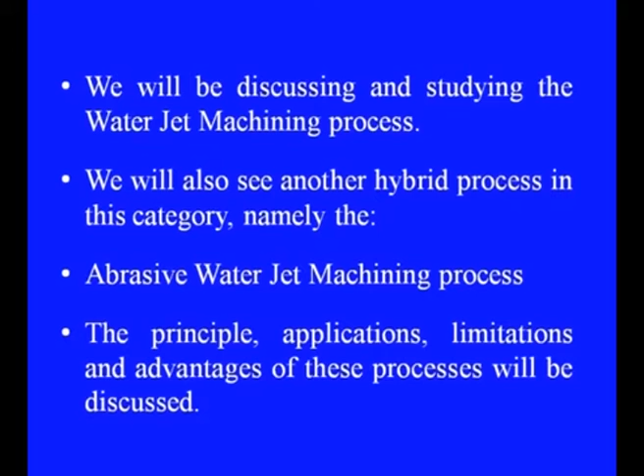Now, let us move to water jet machining, popularly known as WJM. In this process, a water jet is used which acts as a tool in the form of a water saw. This water jet at high velocity and pressure is able to slice materials and some metals using abrasive particles mixed in it. This works something like this.

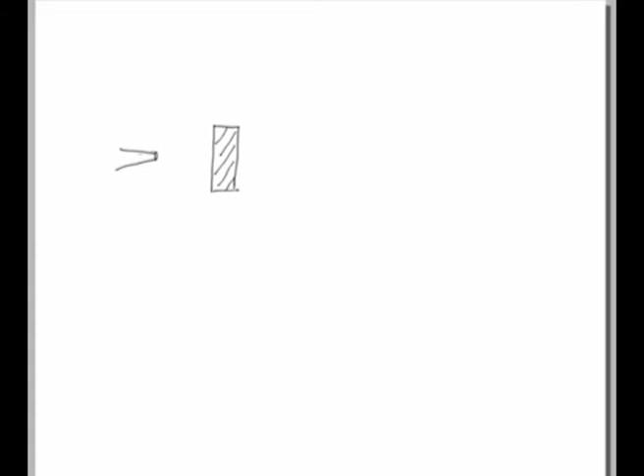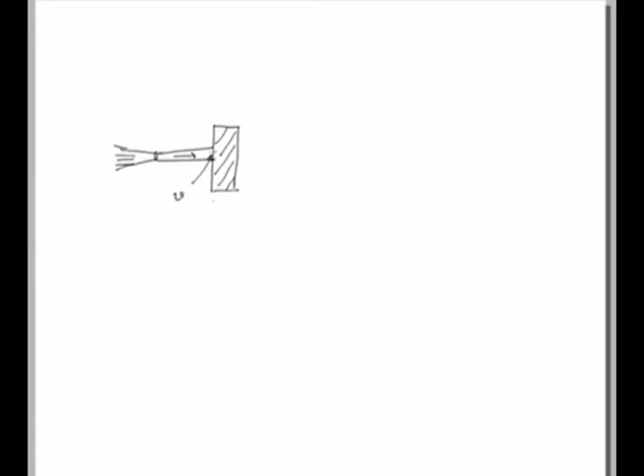Let us consider this is the target material to be machined, and we have a water jet at very high velocity coming through this. This will strike the work material at a very high velocity V, and because of the kinetic energy of these particles, this will cause a crack into the work material, which will ultimately cause failure of this material.

And this will cause removal of the material along the dimension of this jet. So, if this is the profile of the jet, then this will cut or form a cut on this material, something like this, after repeated application of this jet for a particular period of time.

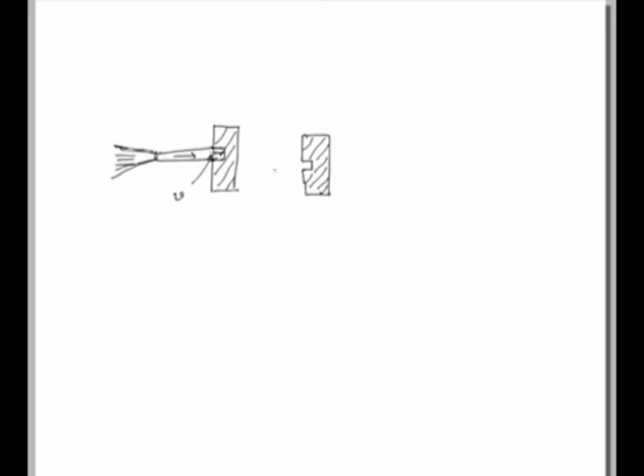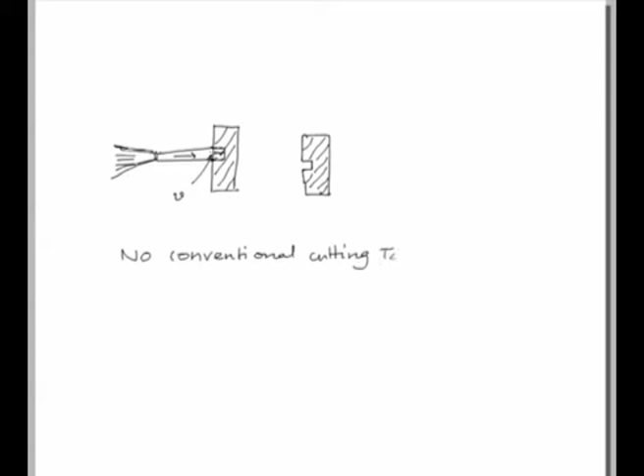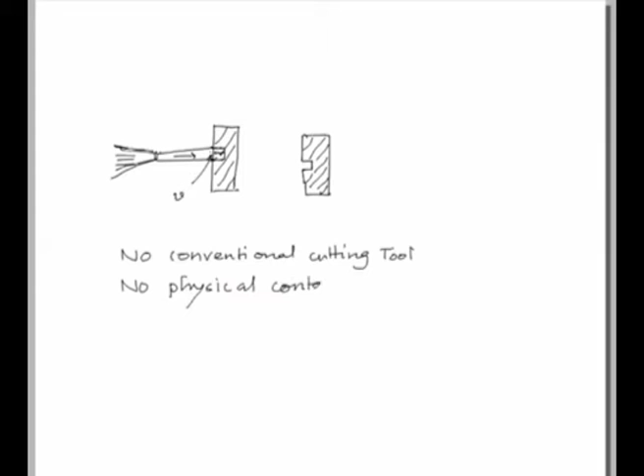So here, therefore, what we conclude is there is no conventional cutting tool, what we call in conventional technology, and therefore no physical contact between the two. The contact is only through the water jet, which attains very high velocity through this jet by the process of conversion of high pressure into high velocity while passing through this jet. So, in brief, this is the working principle of this particular process.

Let us see in detail about the process, its different components, advantages, disadvantages, and so on. This process resembles the water erosion phenomena existing in nature. In this process, water is greatly accelerated, as I have already shown, and further concentrated on the target workpiece.

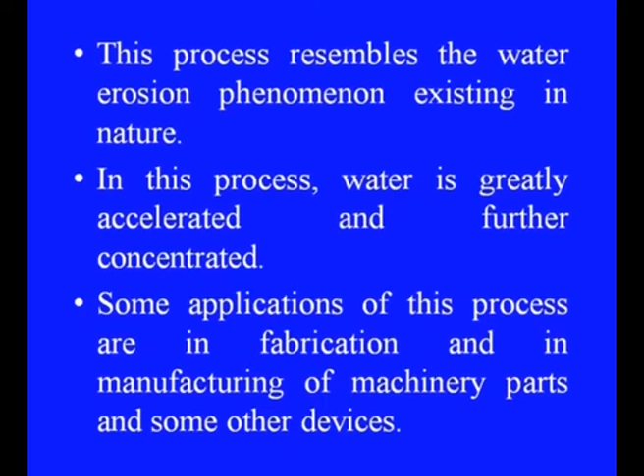Some applications of this process are in fabrication and manufacturing of machinery parts and other devices. Basically, brittle and hard materials are more suitable for this particular process, although all sorts of materials including rubber and metals can be machined or cut.

As most metal cutting techniques generate high heat affected zones, also called HAZ, this method is free from fabrication induced defects. This is a big problem with almost all thermal based manufacturing techniques, where very near the cutting zone there will be a defective zone, also called heat affected zone. But in this process, being a mechanical process, there is no heat affected zone related to water jet cutting or machining. This method is moreover environmental friendly, hence it is more preferred.

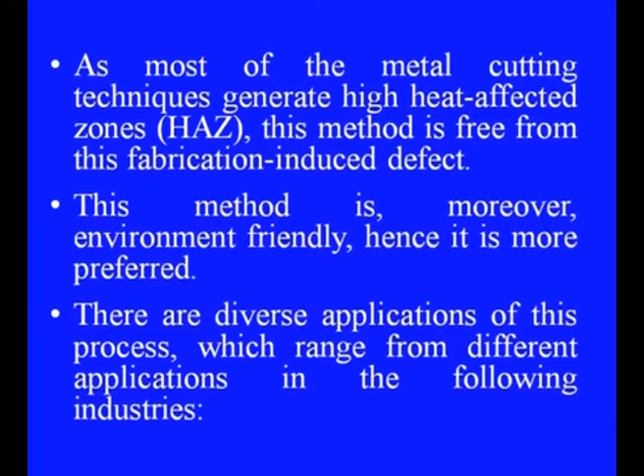There are diverse applications of this process, ranging across different industries. In mining industries, rocks and hard materials can be very easily cut without causing any chemical disturbance to the mined materials, or any possibility of fire hazards, as there is no temperature increase in this process and the working fluid used is water. Then in aerospace industries, it is primarily used for cutting, carving, and shaping applications.

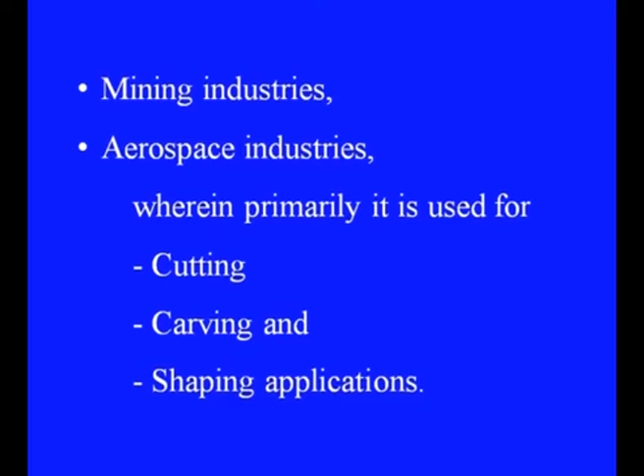Water jet machining and abrasive water jet machining have potential for cost reduction and speeding up the process through considerable reduction in secondary processes of machining. The cut edges are clean with fewer burrs, as there is no heat application.

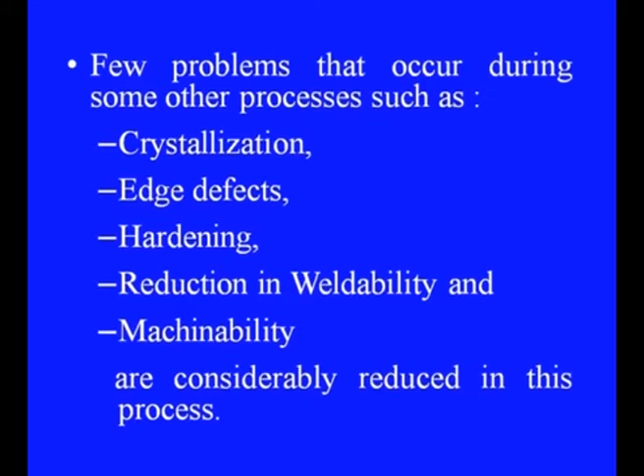Few problems that occur during some other processes include crystallization, edge defects, hardening, and reduction in weldability and machinability. These are some problems associated with other popular manufacturing techniques, but these types of problems are considerably reduced in the water jet machining process.

This fluid is drawn up by a pump system and intensifier, which pumps it to an accumulator, where very high pressure water will be created. This pressurized water will be allowed to flow into the nozzle through some control device. Control valves will be there in between, helping the operator maintain the quantity of water being flown.

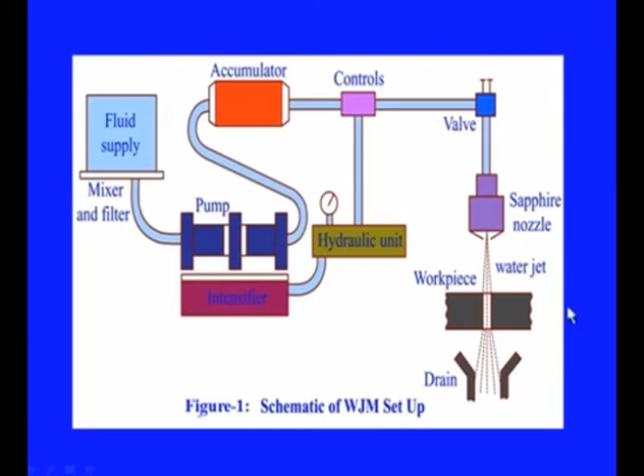This basically enhances the performance of the cutting process, or the efficiency of the entire setup gets enhanced. So in this entire system, the following major components are required.

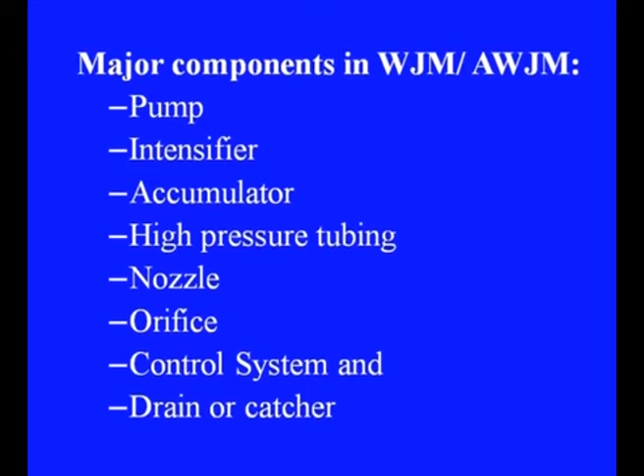Number 1 is the pump for pumping the water, then the intensifier and accumulator which will accommodate the high pressure water, then high pressure tubing through which the pressurized water will flow in, and the nozzle through which the pressurized water will be directed to the target workpiece, then the orifice through which the water will actually come out, then the control system for controlling the flow of water pressure or the flow of abrasives and the appropriate mixer, and then the drain or catcher for the water coming out after the workpiece.

The pump is used to create pressure in the liquid in the range of 1500 to 4000 bars. Thus we can see this is a very high pressure that will be created in water. In achieving this pressure, an electric motor of 50 to 100 horsepower rating is used.

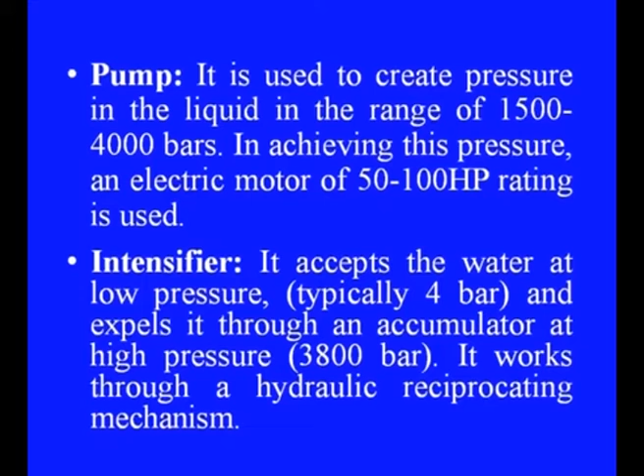Now let us see what an intensifier is. It accepts water at low pressure, typically at 4 bar, and expels it through an accumulator at high pressure, approximately 3800 bar. It works through a hydraulic reciprocating mechanism which is responsible for intensifying or enhancing the pressure of the fluid.

Then what happens in the accumulator is it maintains the continuous flow of high pressure water and eliminates pressure fluctuations during the working of the system. A continuous pressure is maintained through this unit, which is also known as the accumulator.

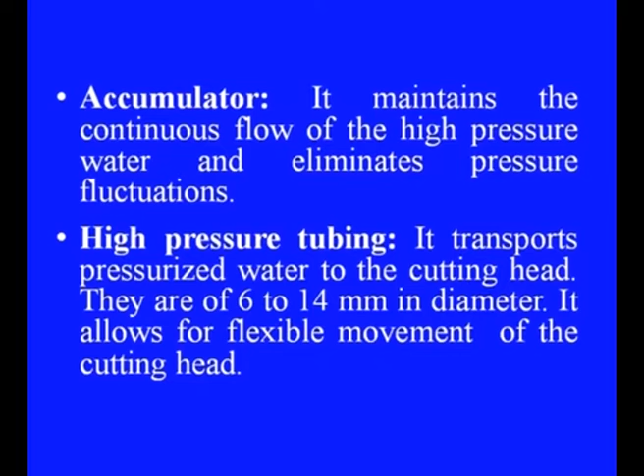Then a high pressure tubing. The function of this is to transport pressurized water to the cutting head. They are 6 to 14 millimeters in diameter, depending on the application in which we are using it, and it allows for flexible movement of the cutting head. Jet cutting nozzle.

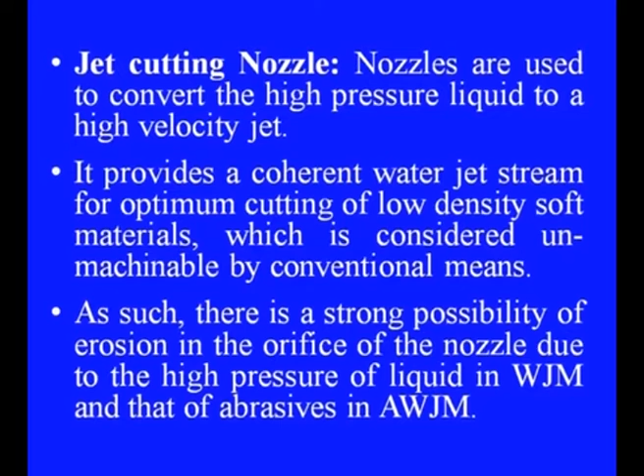These nozzles are used to convert the high pressure liquid into high velocity jet. This is the unit where this pressure, high pressure will be converted into high velocity. It provides a coherent water jet stream for optimum cutting of low density soft materials, which is considered unmachinable by conventional means. As such, there is a strong possibility of erosion in the orifice of the nozzle due to high pressure of liquid in water jet machining and that of abrasives in abrasive water jet machining.

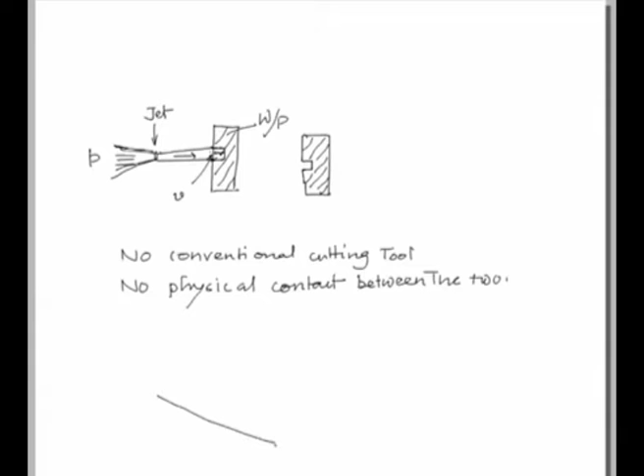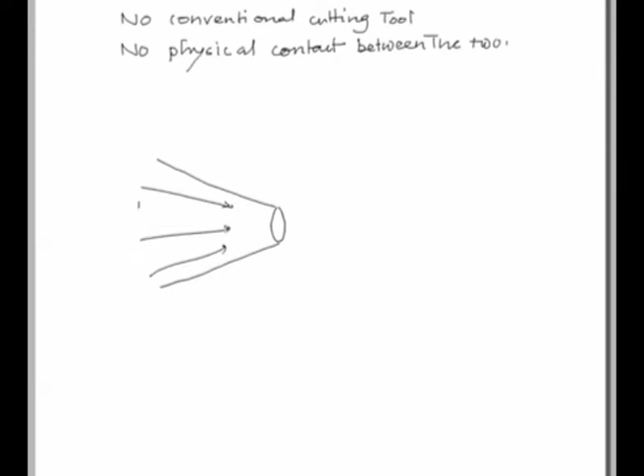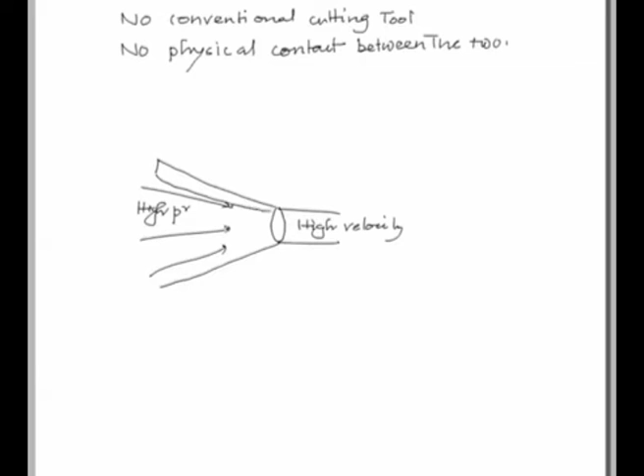This jet is a very crucial component in this entire setup. Since the water will be coming through this at very high pressure, at this stage it will be of high pressure, and at this stage while discharging it will be of very high velocity. Therefore, there is every possibility that this jet wall may get eroded or some deteriorations on this jet wall will take place because of this high velocity fluid passing through this.

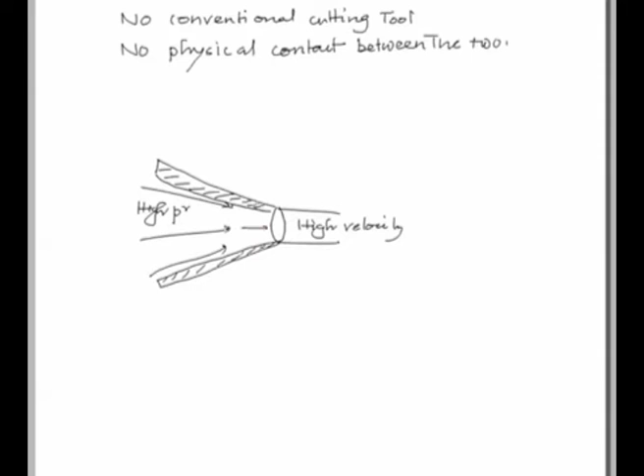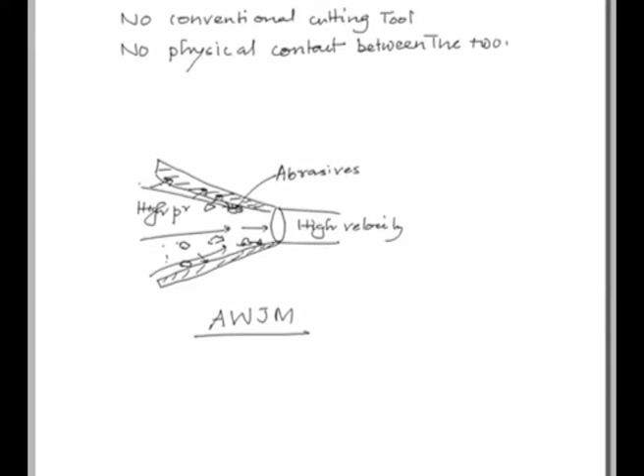Also, if this is AWJM, abrasive water jet machining, then in addition to this water there will be abrasive particles mixed in, and these jet walls are the materials which will have to withstand this pressure of this fluid as well as the impact of these abrasive particles. Now, because of this continuous impact of these abrasives and this flowing fluid, these jet walls may get eroded very frequently, and this is one of the major problems being encountered in this system. Therefore, choosing the right material for this jet or this nozzle is a very big question.

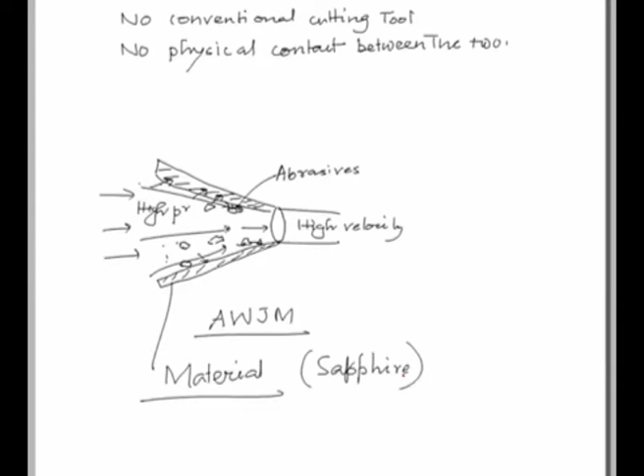Generally, sapphires are used, which are considered to be a very good material as far as these nozzles are concerned. Therefore, a high wear resistant material such as synthetic sapphire is used as nozzles, as I have already told, and a picture is there on the screen also. This is how it works.

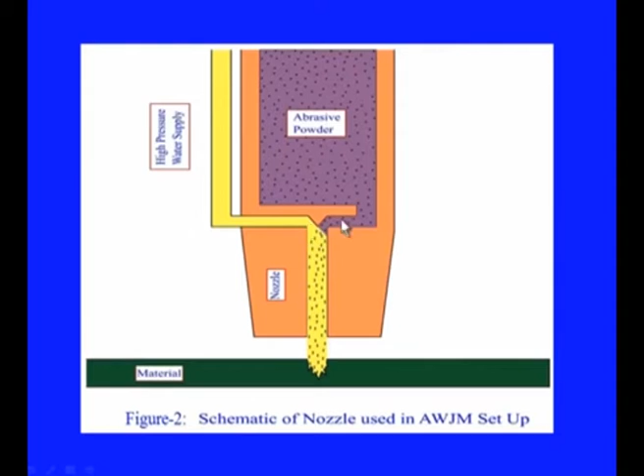This is the abrasive powder or abrasives, and this is the high pressure high velocity water coming out, and this is where it gets mixed. This jet or nozzle wall will have to bear this pressure as well as the abrasive action of these abrasive materials, while enabling this jet, this mixture of high pressure water as well as the abrasives, through this.

Let us see the functions of the drain or the catcher. It acts as a reservoir for collecting the machining debris entrained in the water. It also helps to reduce the noise level associated with the reduction in velocity of the water jet.

Now, let us look into the factors that affect water jet machining performance. These factors are generally grouped into three major categories. The first is jet or nozzle based parameters. Here the jet diameter or the nozzle diameter is one of the major factors. Higher the diameter of this nozzle, the more possibility that the water stream coming out through this nozzle will get diversified, or there will be more diversion.

Then the standoff distance, as we have seen in case of abrasive jet machining, is the distance between the jet opening and the target material. This is a very critical parameter. Depending on this, the energy with which the energized water particles and the abrasive particles hit the target will vary, and accordingly the performance of the process will also vary. There has to be an optimized distance for this standoff between the nozzle and the target.

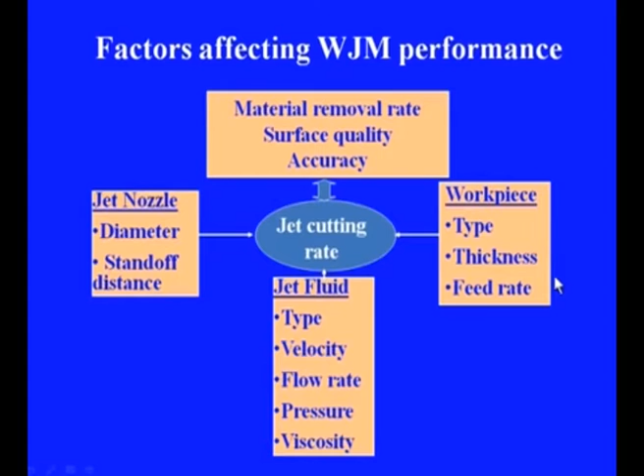Then the third category is the workpiece related parameters. Here we consider the type of the workpiece, the thickness of the workpiece, and the feed rate of the workpiece. It is to be mentioned that if the thickness is very high, the process may not be very efficient. So all these three categories of parameters will affect the final outcome of this process, which is either cutting, finishing, or cleaning of the target surface.

Let us see a few parameters like what are the cutting rates for various materials, like leather. For leather of thickness 2.2 millimeter, feed rate used is 20 meter per minute. Similarly, if the material is vinyl chloride with a thickness of 3 millimeter, the feed rate suggested is only 0.5 meter per minute. Similarly, for polyester of 2 millimeter thickness, the feed rate is 150 meter per minute.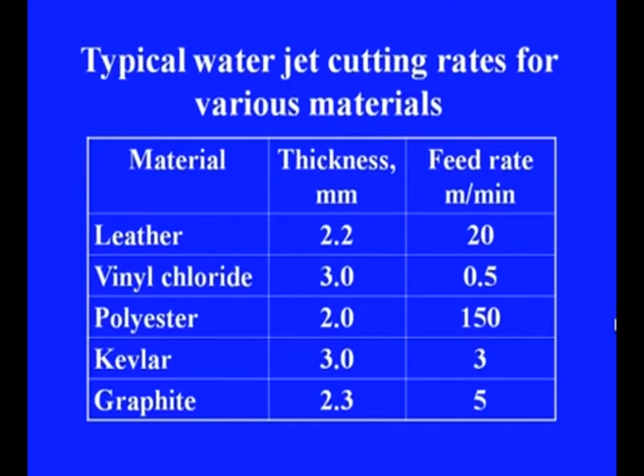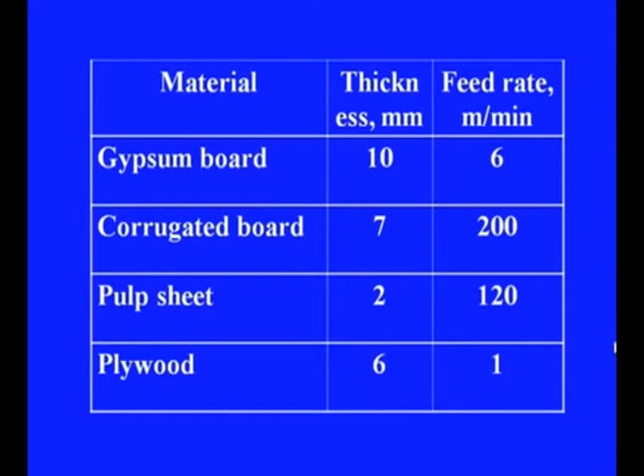For Kevlar of 3 millimeter thickness, only 3 meter per minute. Then for graphite of 2.3 millimeter thickness, 5 meter per minute is recommended. For gypsum board of 10 millimeter thickness, feed rate is 6 meter per minute. Corrugated board of 7 millimeter, feed rate is as high as 200 meter per minute. Pulp sheet for 2 millimeter thickness, feed rate suggested is 120 meter per minute. Then for plywood of 6 millimeter thickness, 1 meter per minute feed rate is suggested.

Abrasive water jet machining is a subcategory of water jet machining in which an abrasive is introduced in the water to accelerate the process, as I have already discussed with the help of diagrams. Hence, this abrasive water jet machining process is duly considered as an extension of the water jet cutting machining process. It is also called a hybrid process of basic WJM, in which hybridization in the form of abrasives leads to an enhancement in the cutting performance or the cutting rate.

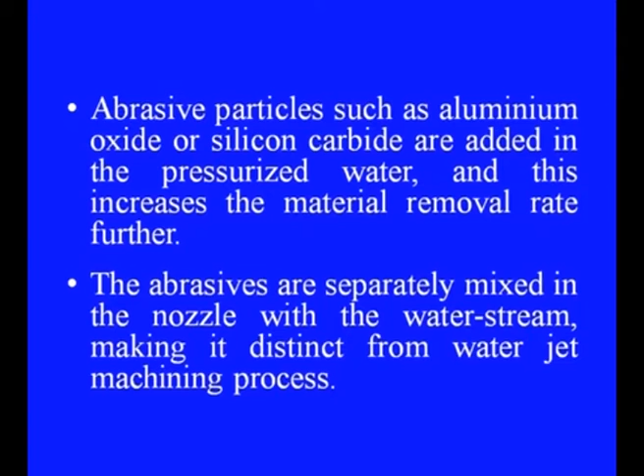Abrasive particles such as aluminum oxide or silicon carbide are added in the pressurized water, and this increases the material removal rate further. The abrasives are separately mixed in the nozzle with the water stream, making it distinct from the water jet machining process, in which only pure water is used as the cutting media.

The abrasive water jet cutting process is suitable for machining different types of materials, ranging from hard, brittle ceramics and glass to soft materials like rubber and foam. In fact, water jet machining process is considered to be a very effective machining process for cutting very soft materials like rubber and foam, which are otherwise difficult to cut by some conventional machining processes.

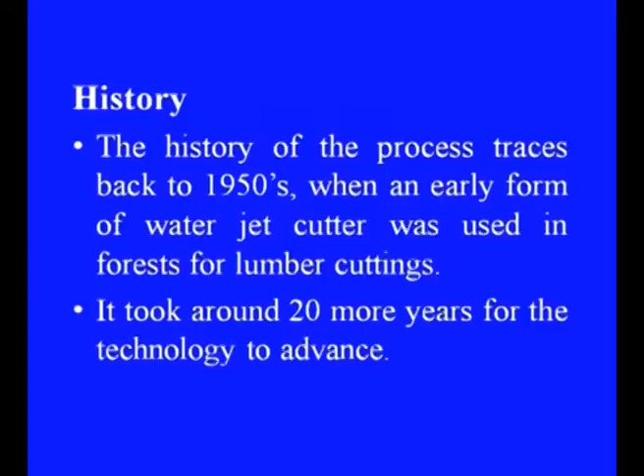Let us look into a little bit of historical development about this process as well. The history of this process traces back to the 1950s, when an early form of water jet cutter was used in forests for lumber cutting. It took around 20 more years for the technology to advance further. Later in the 1970s, industrial abrasive water jet machining was introduced.

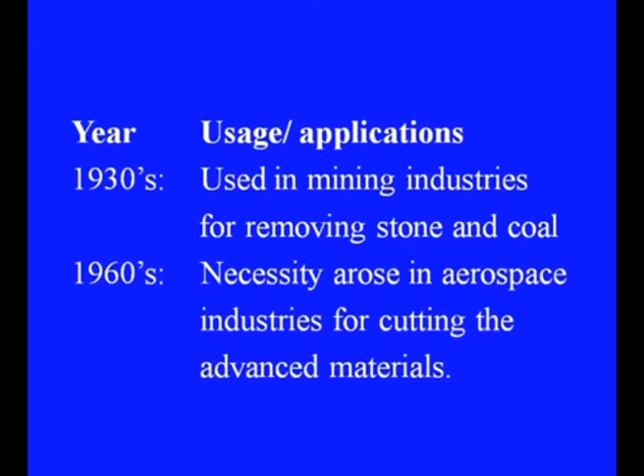Nowadays, this process is matured and has changed the manufacturing methods of many products. A brief chronological evolution of this water jet machining process is something like this: in the 1930s, this was used in mining industries, although not in the present form of water jet machining that we use today. This was at that time used for removing stone and coals by the sheer pressure of water. Then during the 1960s, necessity arose in aerospace industries for cutting advanced materials, which are also otherwise difficult to cut through conventional machining processes.

Coming to the 1970s, the earliest attempt was made in aerospace again for advanced composites using water jet process. Then during the 1980s, the first commercial abrasive water jet machines were introduced.

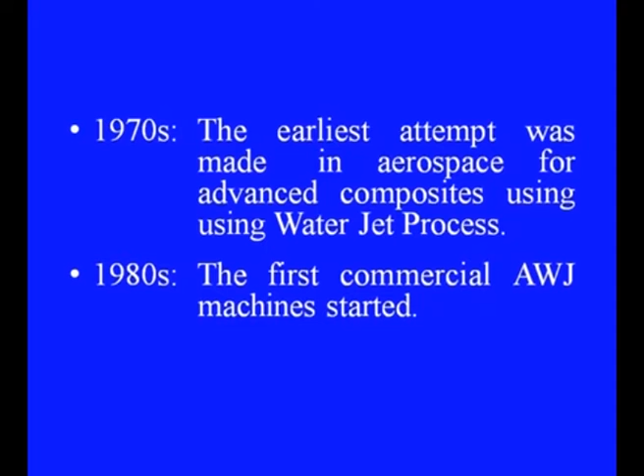The process water jet machining is further available in a variety of different modes. They are also known as plain water jets, abrasive water jets, cavitation jets, percussive water jets, and hybrid water jets.

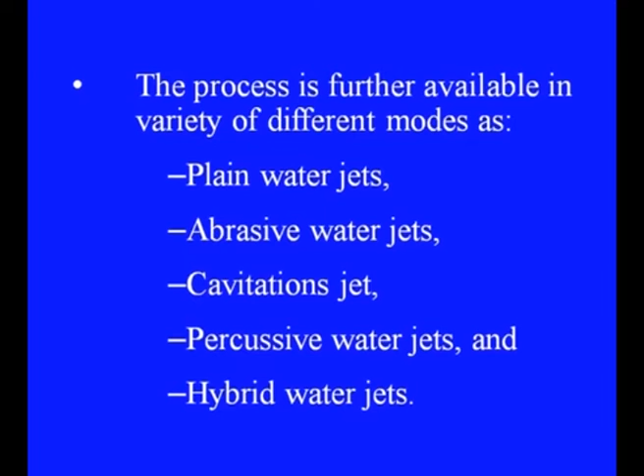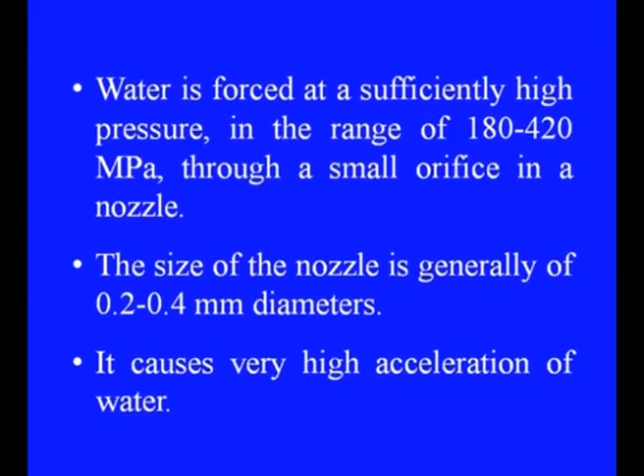Now let us look into a little theory of water jet and abrasive water jet machining. In this process, water is forced at a sufficiently high pressure in the range of 180 to 420 megapascal through a small orifice in a nozzle. This is what I have already discussed in the early part of this session. The size of this nozzle is generally 0.2 to 0.4 millimeter in diameter, and it causes very high acceleration of the water, which is already under pressure.

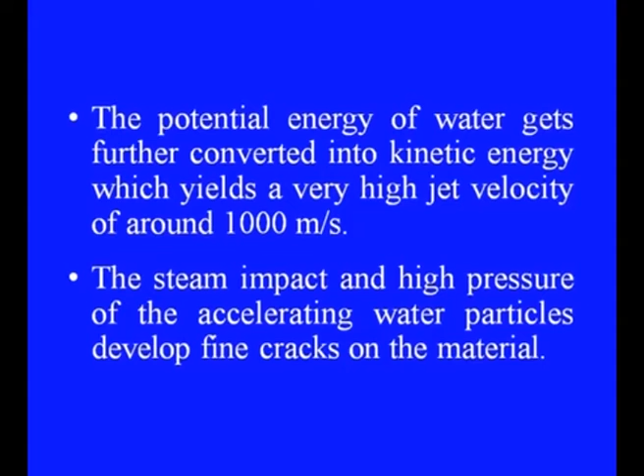The potential energy of water gets further converted into kinetic energy, which yields a very high jet velocity of around 1000 meter per second, which is in fact a very high velocity. The stream impact and high pressure of the accelerating water develop fine cracks on the material.

These fine cracks propagate further under the impact of high pressure and abrasives. With crack propagation taking place to a considerable extent, it is considered to be the basic phenomenon of material removal, which helps in cutting the material finally.

In abrasive water jet machining, particles of abrasives such as sand, which is silicon oxide SiO2, or beads of glass are added in the water jet. This enhances the cutting ability by many folds.

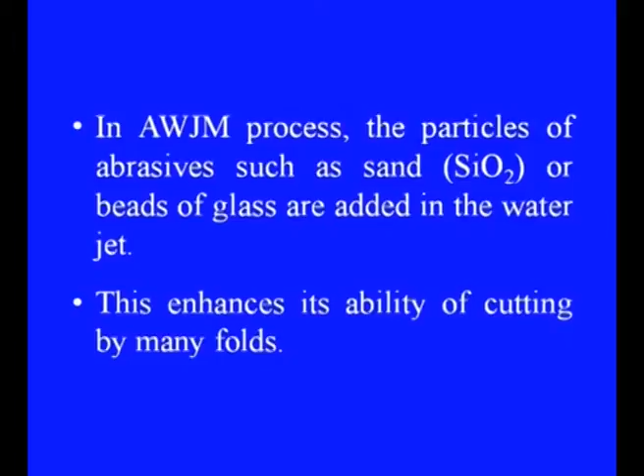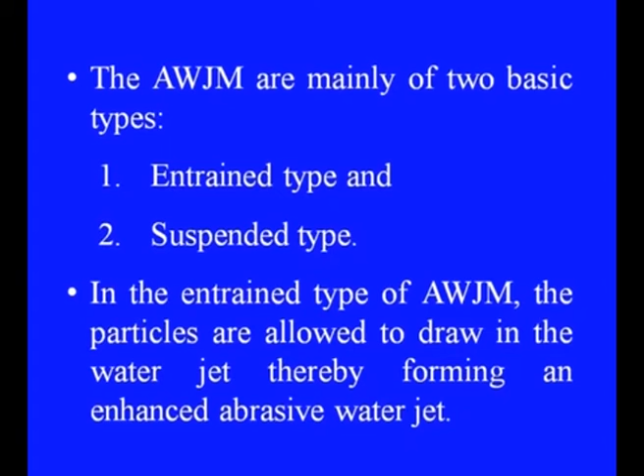Abrasive water jet machining is mainly of two basic types: the entrained type and the suspended type. In the entrained type, the particles are drawn into the water jet, forming an enhanced abrasive water jet. In the suspended type, both are mixed prior to sending to the jet at very high velocity.

It helps in developing significantly higher velocities, around 800 meters per second. Almost any material can be machined at such a high velocity of this abrasive jet.

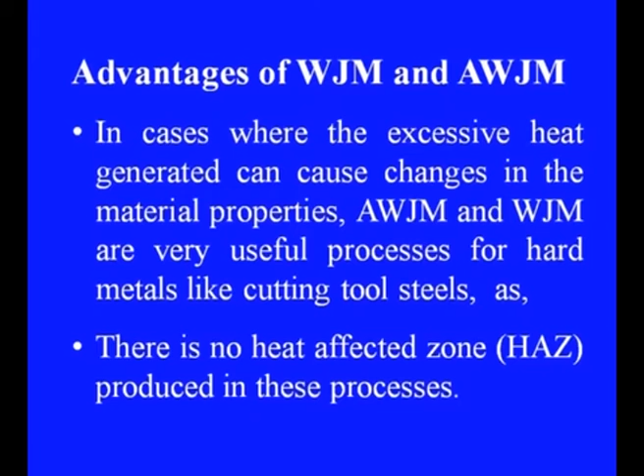Let us look into the distinct advantages of water jet machining and abrasive water jet machining. In cases where excessive heat generated can cause changes in material properties, as discussed already, in abrasive water jet and water jet machining there is no thermal rise in temperature. Therefore they are very useful for hard metals like cutting tool steels, as there is no heat affected zone in these processes.

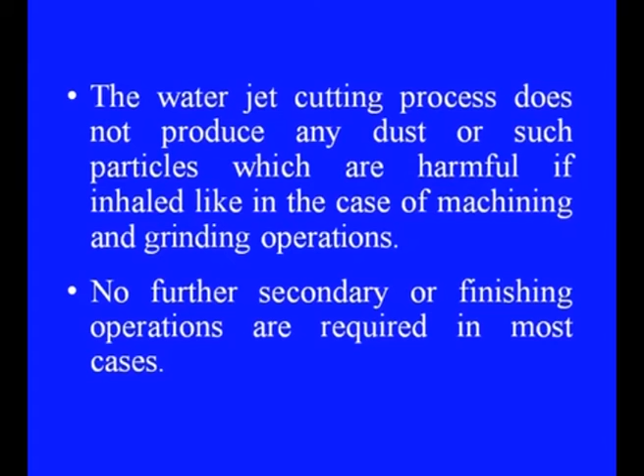The water jet cutting process does not produce any dust or particles which are harmful if inhaled, unlike in machining and grinding operations.

Recall the earlier session: in abrasive jet machining the abrasive particles are also very dangerous for the operator. They need to be handled very carefully, collected carefully after the work is done. Otherwise inhaling those particles, even in grinding where fine powder swarf is created, can be hazardous for people working in and around that environment.

However, in water jet machining, this problem of flying particles in the environment near the machine setup is not there. Only water mist may be present, which is not as harmful as abrasive or other chemical particles as far as the operator's health is concerned.

Also, no further secondary or finishing operations are required in most cases. In abrasive water jet machining, the cutting forces generated on the workpiece are typically very low, and the tooling requirements are limited.

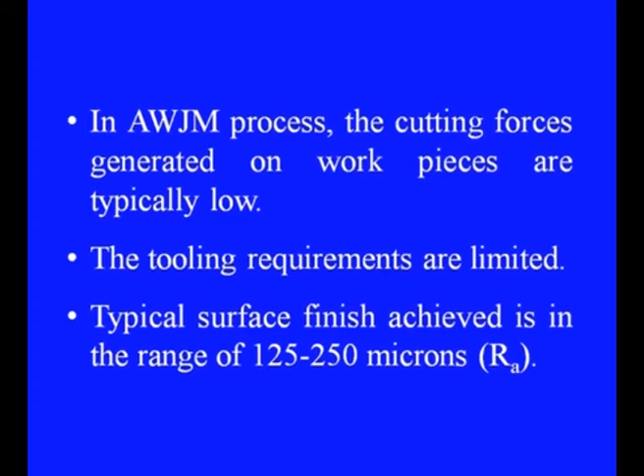The typical surface finish achieved is in the range of 125 to 250 microns of average roughness, which we call RA. Material wastage is reduced due to smaller kerf sizes.

There is no cutter-induced metallic contamination. The process also eliminates thermal distortions near the cutting zones. The tool does not wear, and therefore there is no tool resharpening cost. As indicated at the very beginning, there is no physical tool involved in this, and therefore no tool wear.

It can cut metals, plastics, stones, composites, glass, ceramics and rubber. This is another fantastic characteristic of this process. We will find hardly any process which can be as versatile as water jet machining with respect to cutting the range of materials.

In most processes, it can be very good for cutting metals, or very good for cutting brittle materials like glasses and ceramics, or in some cases good for rubber or soft materials like foam. But the characteristic of water jet machining is that it is equally good or versatile for all these materials at the same time.

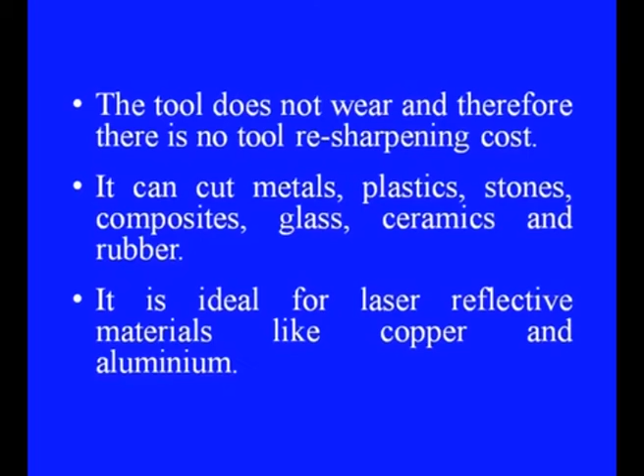It is ideal for laser-reflective materials like copper and aluminum. As we know, copper and aluminum reflect laser, making them very difficult to cut precisely by laser machining. However, with water jet machining, this type of problem does not arise.

Simple fixturing eliminates costly and complicated tooling associated with some other processes, which reduces turnaround time and lowers processing cost. It can start cutting at any location without the need for any pre-drilled holes.

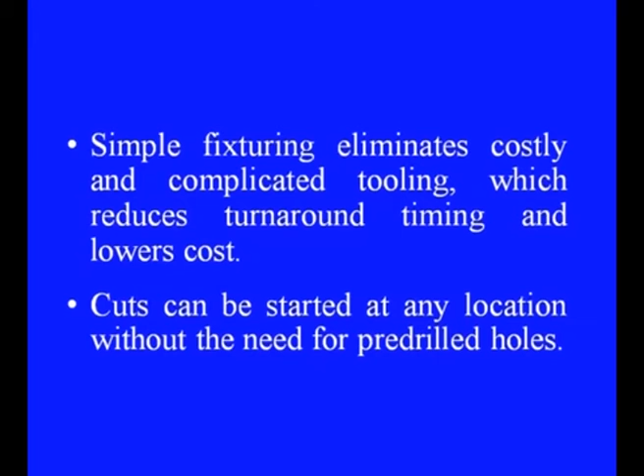While talking about the advantages of this process, let us also look at some of the limitations of water jet machining and abrasive water jet machining.

It cannot cut materials that degrade quickly with moisture, because water is essentially the component responsible for cutting. Higher cutting speeds are frequently used for rough cutting purposes, which degrade the surface finish.

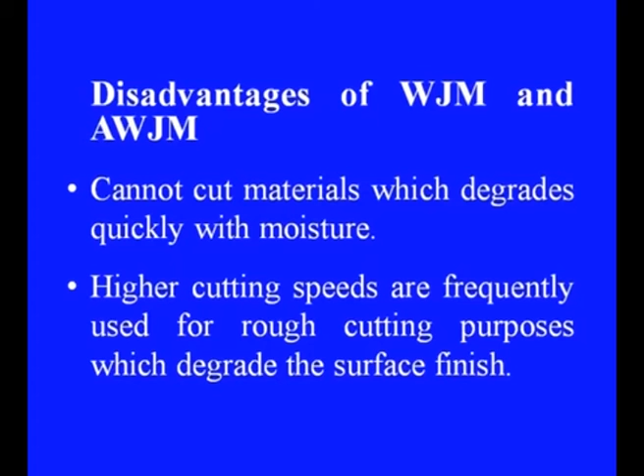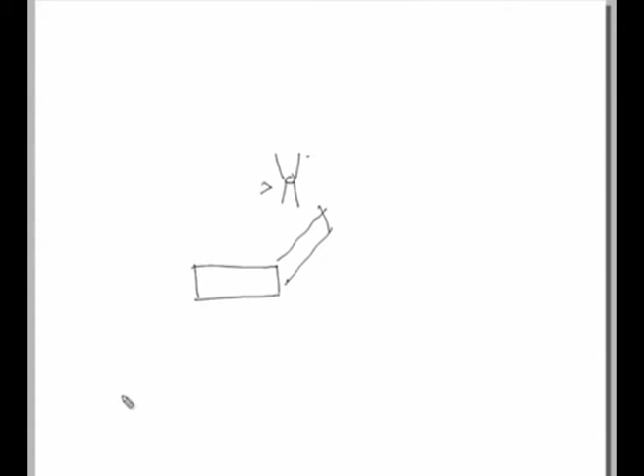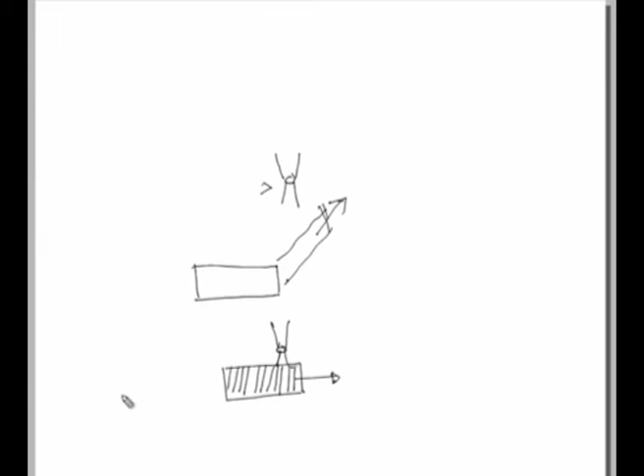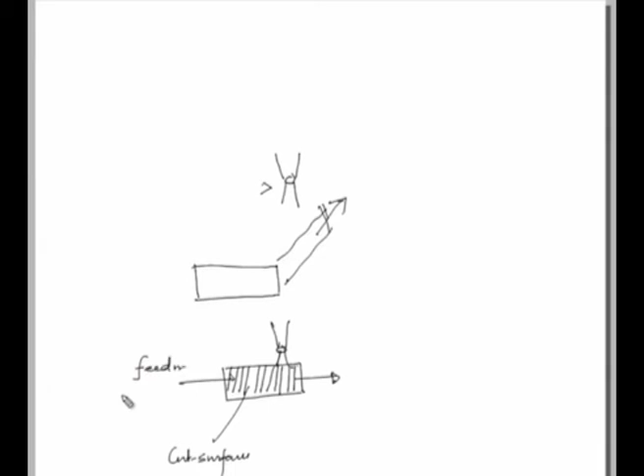These inaccuracies as far as the surface finish is concerned arise like this. This is the workpiece and this is the jet coming through. As we feed either the jet or the workpiece in this direction, there will be a relative velocity between the jet and the workpiece being fed continuously. Because of this, unless we take some precaution, there will be feed marks along the surface of the cut. This is the cut surface, and these marks are called feed marks, similar to conventional machining processes. This will also appear here and give rise to the Ra value.

Therefore, there are certain mechanisms nowadays to take care of this kind of problem. In the software itself, we can maintain the speed, the feed, and the angle of the jet in such a way that these feed marks can be minimized. This is the feed and this is the jet.

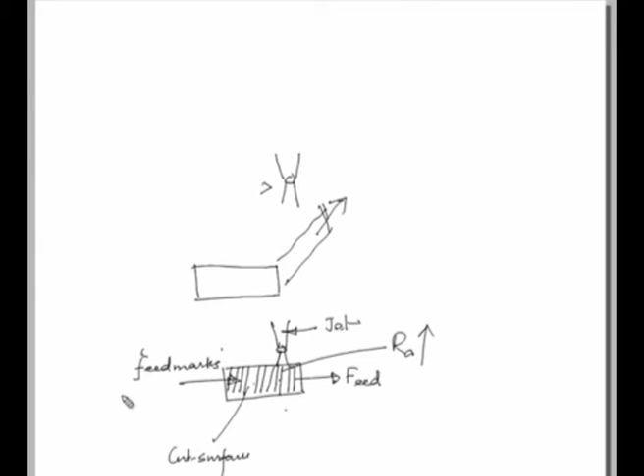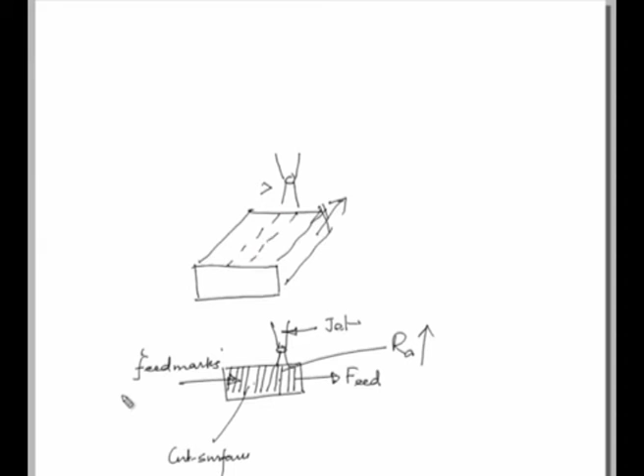There is a strong possibility of cracking in brittle materials, and only a few varieties of materials could be cut economically. As I mentioned at the beginning, cutting takes place because of crack initiation and further propagation of the crack. So if it is a brittle material, as we know, it is essentially prone to cracking. This cracking can even go towards the side rather than the exact perpendicular direction where cutting is intended, and therefore it can make the workpiece worse, which we do not want.

With water jet machining process, thick parts cannot be cut accurately and economically. In thicker materials, taper generation is also a problem, as we told in the case of abrasive jet machining. So here also the taper problem may be there.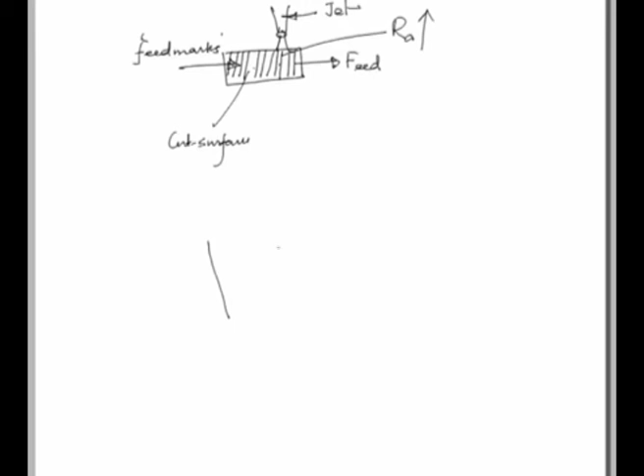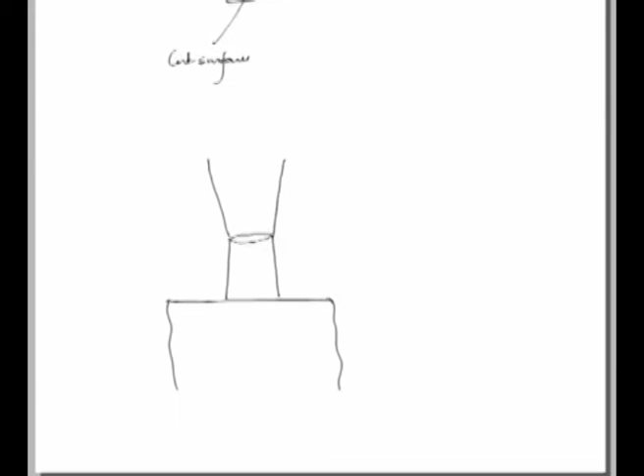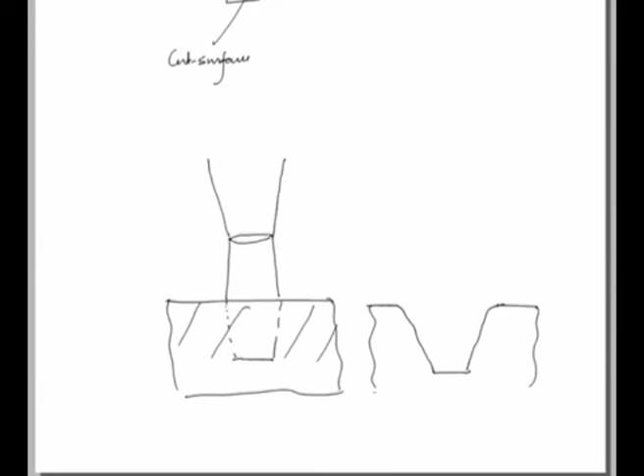In this case, if the jet is something like this and it falls on the work surface like this, then as it cuts through, towards the end of the cutting its effectiveness may get decreased and there may be a taper formation, as in the case of abrasive water jet, as we have seen in the previous session. The final cut can be something like this, which we do not want in the workpiece. This would have been a hole or cut mark like this. However, this kind of inaccuracy is what we can call the inaccuracy in case of this water jet machining process.

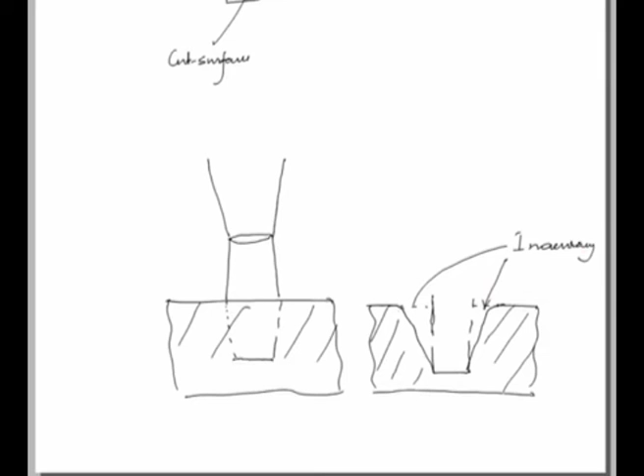We are talking about the disadvantages of this process. Another major disadvantage is that the equipment itself is very costly, and it is a big investment. Also, there are safety concerns due to noise and high pressure. Noise is really a big issue in water jet machining, and of course handling high pressure is always dangerous. Then what are the process parameters?

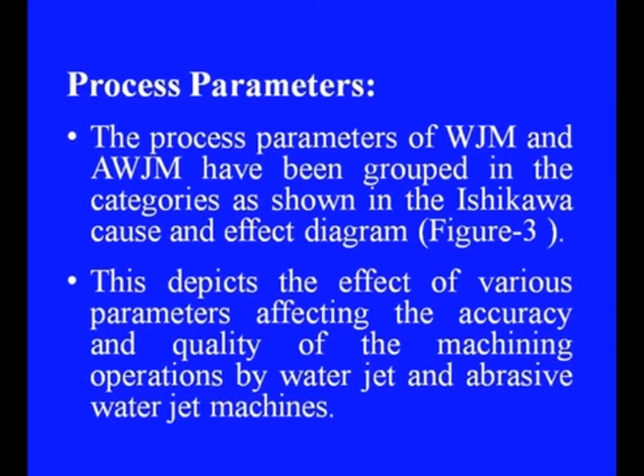Let us have a quick look into the parameters. The process parameters of water jet machining and abrasive water jet machining have been grouped into categories as shown in the Ishikawa diagram. This depicts the effect of various parameters on accuracy and quality of machining operations by water jet and abrasive water jet machining. This is a very familiar Ishikawa cause and effect diagram.

These parameters include hydraulic based parameters like orifice size and fluid pressure. Then abrasive jet parameters like size of the abrasives, flow rate, and the abrasive material itself, which can be silicon carbide or aluminum oxide, etc. Higher the abrasive size, the rate of cutting will be better, but we have to consider the life of the nozzle, which will go down. Then the workpiece material, which may be a composite, a pure metal, or foam-like materials or rubber, etc. Then the hardness of the workpiece material, since it basically works on the principle of formation of cracks, the hardness plays a very important role in the performance.

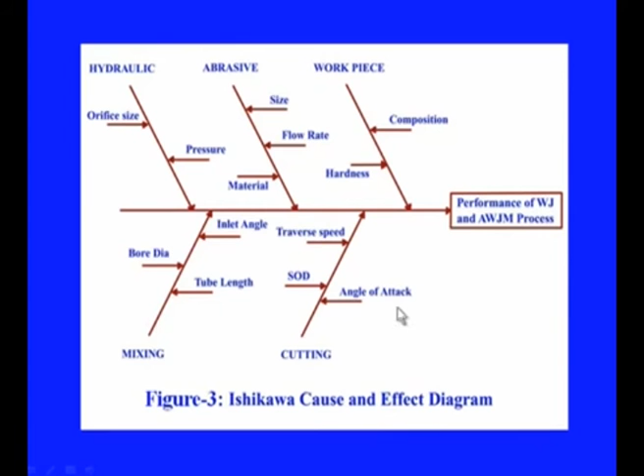Then the mixing parameters like bore diameter, tube length and inlet angle will have an effect, as I indicated, along with the surface roughness criteria, where the inclination of the jet is also an important parameter. Then the cutting parameters like standoff distance, traverse speed, and angle of attack all influence the final product quality and surface finish. As I said, the standoff distance is a very important parameter in this process also.

Larger the standoff distance, the poorer will be the quality and accuracy of the cut. The diameter of the nozzle is also very important.

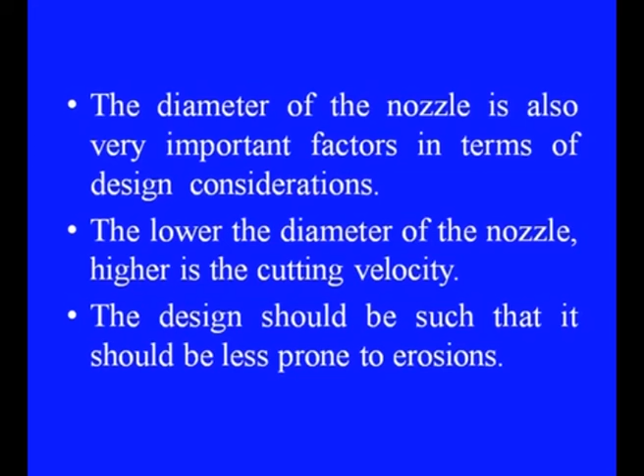As far as the design of the nozzle is concerned, the lower the diameter of the nozzle, higher will be the cutting velocity, and therefore the cutting will be faster. The design should be such that it should be less prone to erosion. A very high degree of polishing and fine radius is provided in it. The life of the nozzle is less as compared to other elements, which adds to the cost. This is considered one of the major disadvantages of this process, where the nozzle is a very costly part to be frequently changed, which adds to the cost and downtime as well.

Let us have a quick look at the applications of water jet machining and abrasive water jet machining.

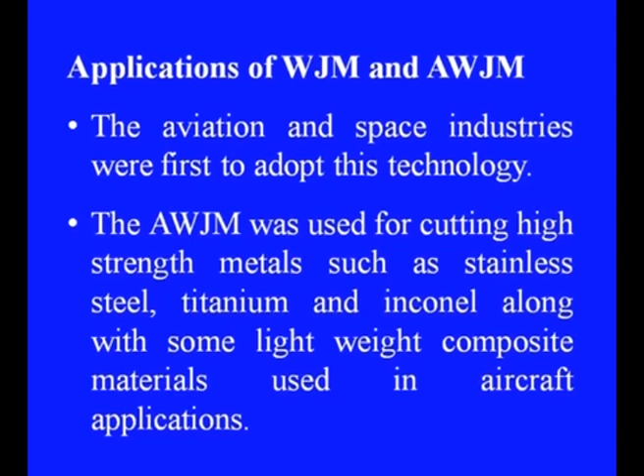This process is frequently used in the aviation and space industries, for cutting high strength metals such as stainless steel, titanium, Inconel, along with some lightweight composite materials frequently used in aircraft applications. In cutting, water jet machining is also limited to fiberglass, corrugated wood and low strength materials like plastics and aluminum.

In drilling, the process drills precision angled and curved holes in a variety of materials for which other processes are too expensive or slow.

In machining of fiber reinforced plastics (FRPs), the thermal material damage is negligible, and therefore this process is preferred. Effectively, a pointed tool accurately cuts the required contours. As we know, FRPs are inhomogeneous with 2-3 phases of different material characteristics, and therefore this process is more suited for cutting this type of material.

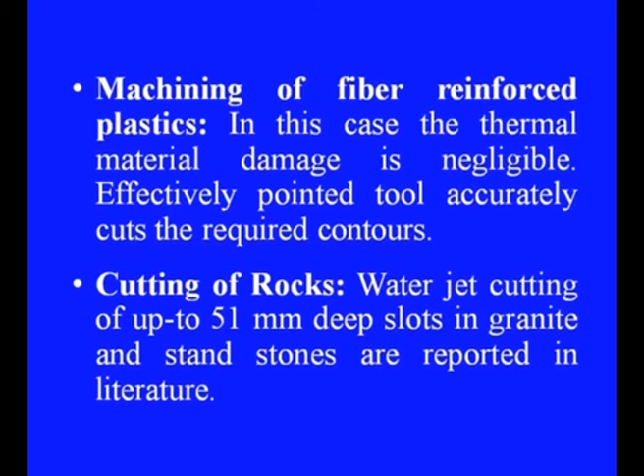Cutting of rocks was, in fact, the first kind of application where pressurized water was used. Water jet cutting of up to 51 millimeter deep slots in granites and sandstones are reported. These are very hard materials, and conventional tools get blunt very fast while cutting them, so the cutting cost becomes too high with conventional methods, whereas this can be safely achieved with the water jet cutting process.

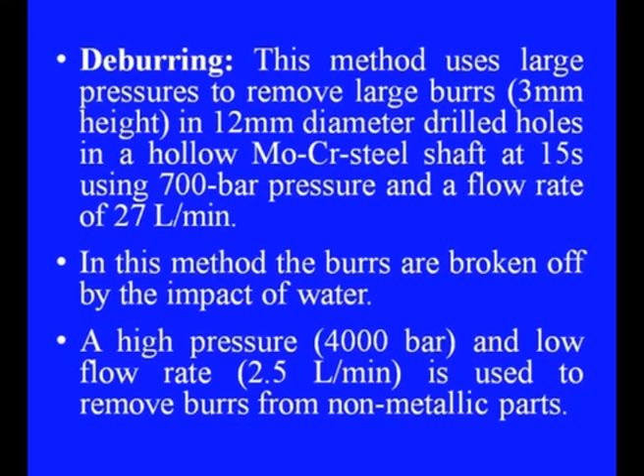Deburring is another area where water jet cutting can be used. Large pressures of water are used to remove burrs, for example 3 millimeter in height in 12 millimeter diameter drilled holes, in a hollow molybdenum chromium steel shaft, and this can be achieved in only 15 seconds using 700 bar pressure and a flow rate of 27 liter per minute. In this method, the burrs are broken by impact of the water. A high pressure as high as 4000 bars and low flow rate of 2.5 liter per minute is used to remove burrs from non-metallic parts.

Another application is cutting of PCBs, or printed circuit boards. Using a small diameter water jet mounted near the part edge, a PCB can be cut at a speed exceeding 8 meter per minute to an accuracy of plus minus 0.13 millimeter. Also, using CNC technology, various shapes or contours can be cut.

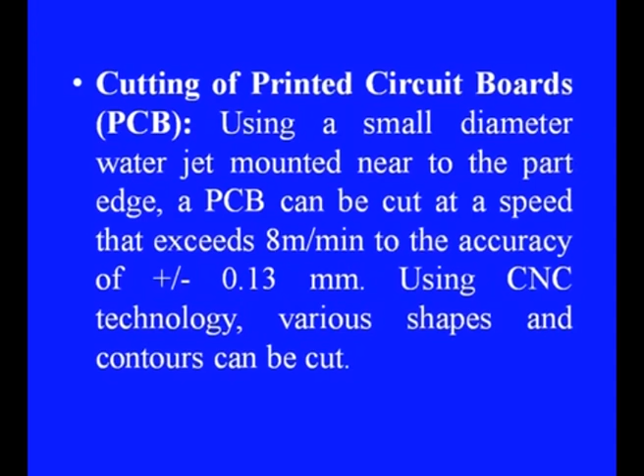This process can also be used for surface treatment, like removing deposits and residues without any toxic chemicals, which eliminates costly cleaning and disposal problems. Also for surface cleaning of pipes and castings, decorative finishing, nuclear decontamination, food utensil cleaning, degreasing, polishing, surface texturing, etc.

Economical surface preparation and coating removal can also be done using this process. Water jet machining can also be used for removing corrosion, spray residue, soluble salts, chemicals and surface damage prior to recoating and painting.

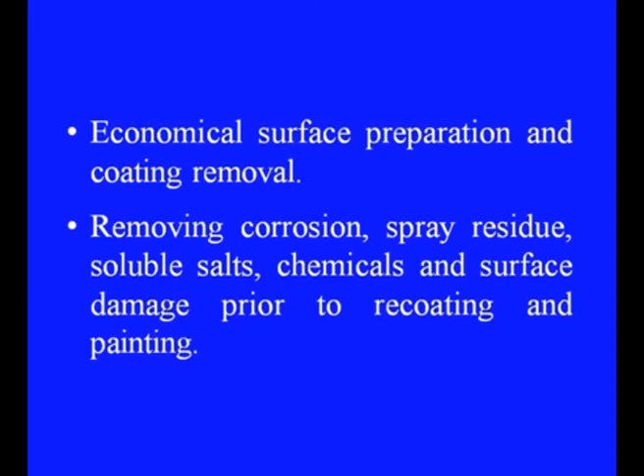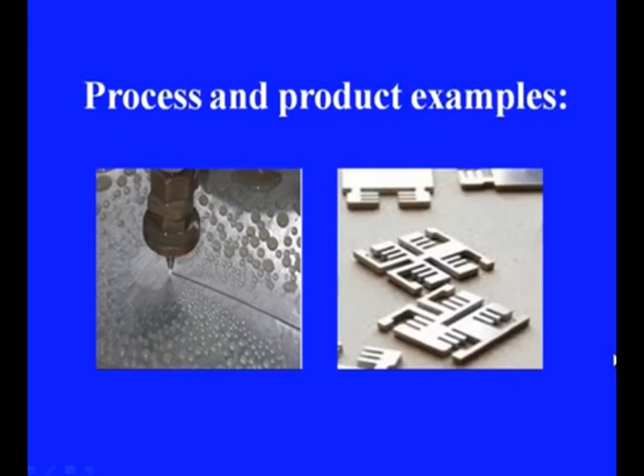Let us summarize what we have discussed today. We have discussed the basics of abrasive water jet machining and water jet machining process, the equipment used in it, and the advantages and limitations of this process. We have also discussed the effect of process parameters, few design considerations like the nozzle design, etc., and the applications of the process that were also introduced.